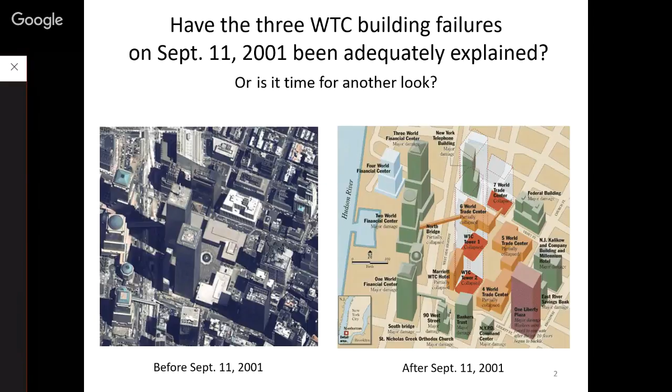As I've just mentioned, there were 3 official reports on the building failures: the FEMA report in 2002 and the 2 reports by NIST in 2005 and 2008.

In addition, there were 3 privately funded reports on the Building 7 failure alone. 2 of those were done as a result of a lawsuit brought by Con Edison and their insurance company against World Trade Center properties. One was done by the Arup Group, for the plaintiffs in that lawsuit. Weidlinger Associates performed a report for the defendants in that study.

In addition, we, AE 911 Truth, funded a study of the Building 7 collapse, performed by the University of Alaska Fairbanks Department of Civil and Environmental Engineering under Professor Leroy Hulsey. He's issued a preliminary progress report in September of last year, and the final report is due out later this year.

Starting with Building 7, it was the 3rd high-rise to collapse that day, about 350 feet north of the North Tower.

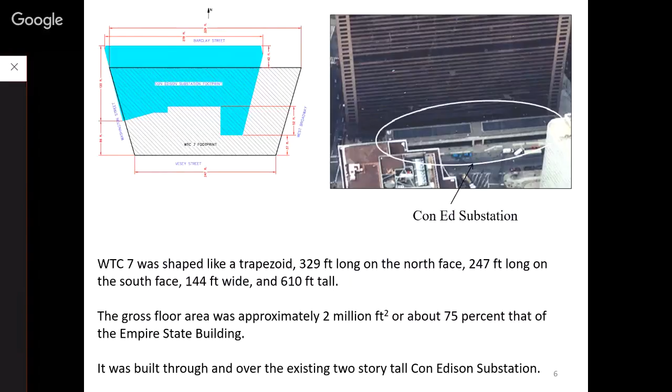It was a 47-story building. Each floor had about an acre of area. It was shaped like a trapezoid. Gross floor area about 2 million square feet, and it was built through and over the existing 2-story tall Con Edison substation, a very unusual arrangement.

We're going to be focusing on the northeast corner of that building because that is where NIST says the collapse was initiated, due to the failure of a girder that ran between column 44 and column 79. In our next photo, we're standing at the northeast corner of the building, looking west down the length of it. What we see overhead running from right to left is the girder itself that supposedly failed, and the beams that framed into it from the east were the cause of that failure by heating and expanding due to the office fires.

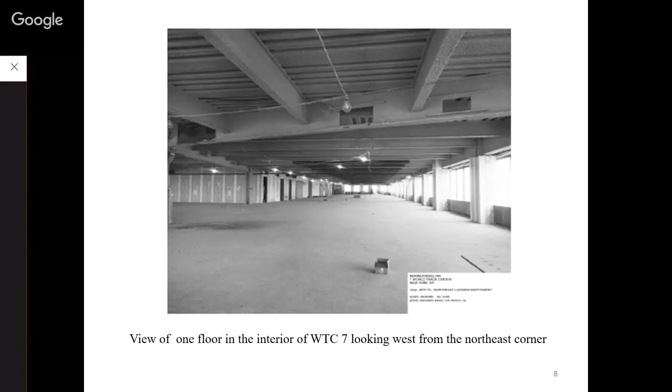The foundation caissons went right through the Con Edison substation, and this is an example of what the construction looked like during the construction phase.

As to the failure itself, it occurred approximately 7 hours after the fall of the Twin Towers, at 5:20 in the afternoon. It was a 610-foot tall steel frame building. It wasn't hit by a plane, but it collapsed and turned into a 5-story rubble pile in about 7 seconds.

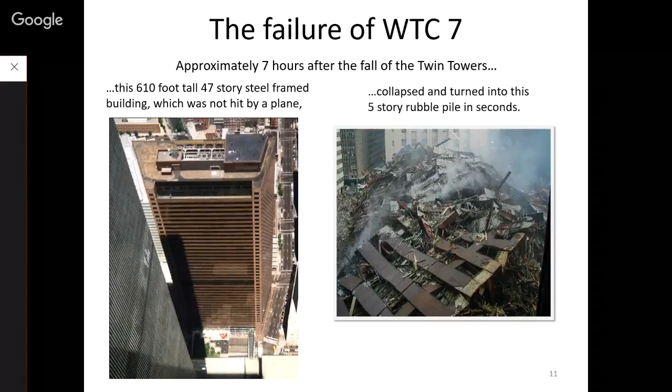We're going to watch that collapse here on video.

For the 3rd time today, it's reminiscent of those pictures we've all seen too much on television before, when a building was deliberately destroyed by well-placed dynamite to knock it down. Did they actually use the word brought down, and who was it that was telling you this? The fire department, and they did use the word, we're going to have to bring it down. We heard this sound that sounded like a clap of thunder. It looked like there was a shock wave ripping through the building, and the windows all busted out. About a second later, the bottom floor caves out. The building followed after that, and we saw it crash down all the way to the ground.

I turned in time to see what looked like a skyscraper implosion. Looked like it had been done by a demolition crew. The whole thing just collapsing down on itself. It was almost as if it were a planned implosion. It just pancaked.

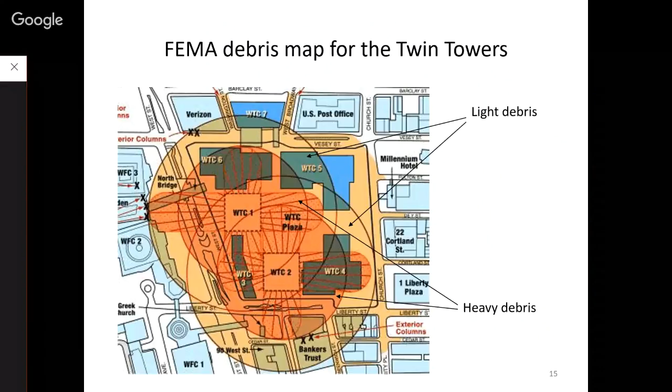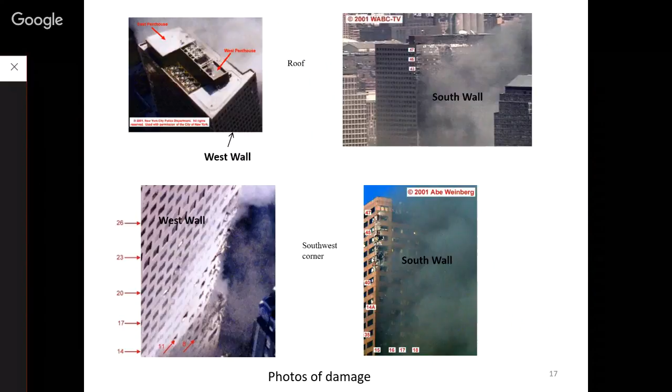There was a series of fires in the building after the World Trade Center towers collapsed, and we can see the smoke from those fires and some of the damage to the west wall here. NIST mapped the damage to the building and indicated there were 2 primary zones of damage: in the lower left-hand corner on the lower floors, and near the top, more toward the center of the building. But they concluded that the debris damage did not affect the collapse of the building.

There was diesel fuel in several small tanks in the building. FEMA thought there might be a low probability of them igniting the fires. NIST agreed that was a low probability, and most of the fuel was recovered from the main tanks in a vault below ground afterwards. Firefighters testified they neither saw nor smelled diesel fuel fires. So diesel fuel as a cause of the fires was eliminated.

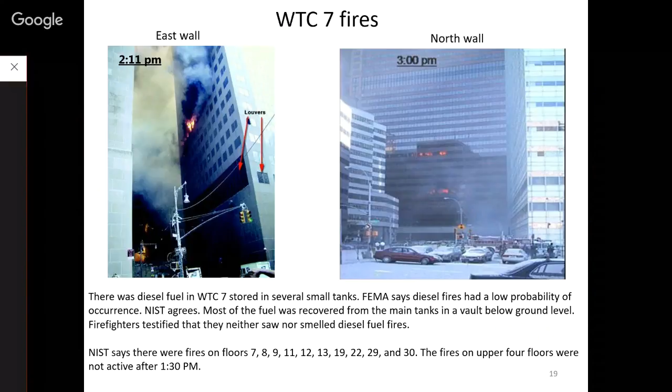NIST noted there were fires on floors 7, 8, 9, 11, 12, 13, 19, 22, 29, and 30 at some point during that day, and that the fires on the upper 4 floors were not active by about 1:30 p.m. Keep in mind the building came down at 5:20.

The NIST collapse theory for the building looks like this. They said that fires on the 12th floor heated the beams in the northeast corner of the building on the 13th floor, and those beams expanded.

Or sagged and pushed that girder off of its seat at column 79 on the 13th floor. That caused the girder to fall off its seat and impact the next floor down on the 12th floor, and that caused a cascade 8 floors down to the 5th floor.

As a result, leaving column 79 unsupported laterally so that it buckled, which then spread north to south and east to west, causing the entire central core columns of the building to progressively collapse and ultimately cause the entire exterior to buckle due to the lack of lateral support for those columns. So that is the NIST collapse theory, how it was initiated, how it progressed, and how it ended.

They said that the reason for the collapse was entirely due to office fires.

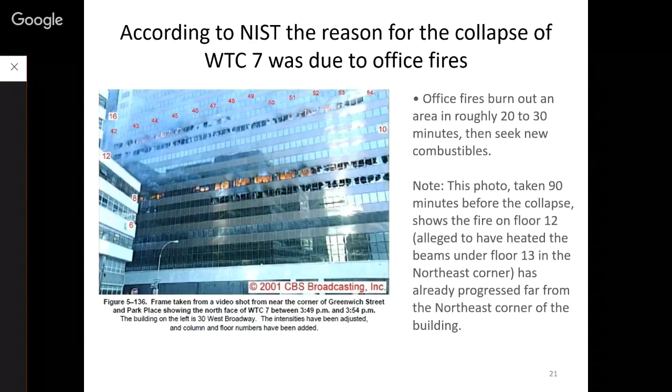Here's the erroneous assumptions, the errors, the omissions, and the other issues with the Building 7 report that we're going to discuss.

The girder bearing seat at column 79 for that girder, according to NIST, was only 11 inches wide. They also said there were no stiffeners on that girder at the column, and that the thermally expanded girder could move past the column 79 side plates, that there were no shear studs on the girder, that the west and south girder connections to column 79 were broken all the way down to the 6th floor.

That the northeast corner floor failure cascaded down 8 floors, that there was no lateral support beams framing into beam G3005, that they notched their beams and girders to simulate their buckling due to fire in their model.

There is evidence of high temperature enough to melt steel documented by FEMA that was ignored by NIST. And the NIST model shows radical deformation of the upper exterior as the east side interior collapses, but that is not observed in the actual video footage of the collapse.

There was a simultaneous free fall of all 4 corners of the roof line, and NIST did not investigate the implications of that. And they refused to respond to legitimate inquiries. So then we'll summarize that before we go on to the Twin Towers.

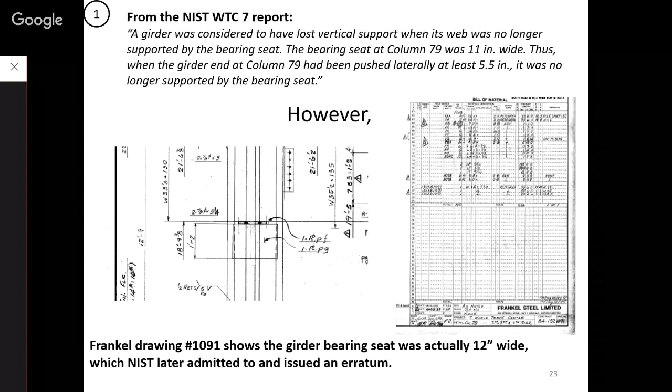We'll stop and take a look at what happens when the beams are heated and the girder's heated and the column is heated and what they were heated to. The NIST report claimed that the beams were heated to 600 degrees centigrade, the girders were heated to 500 degrees centigrade, and the column was heated to 300 degrees centigrade in the area around column 79.

Looking at their stiffness, we see that the beams at 600 degrees have lost 70% of their stiffness. The girders at 500 degrees have lost 40% of their stiffness, and the columns at 300 degrees have lost 20% of their stiffness. So we take those temperatures as gospel, and we use those same temperatures in our analyses that we ran in the Building 7 report at the University of Alaska.

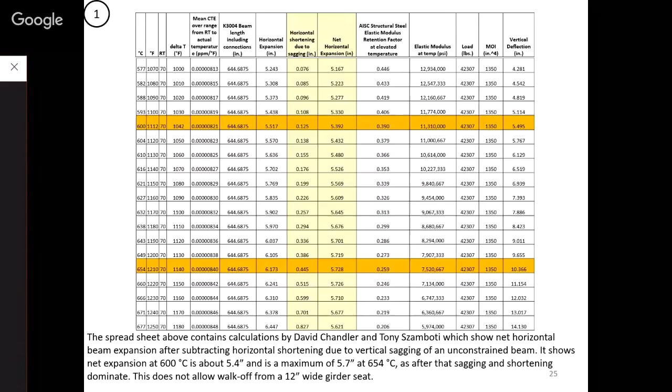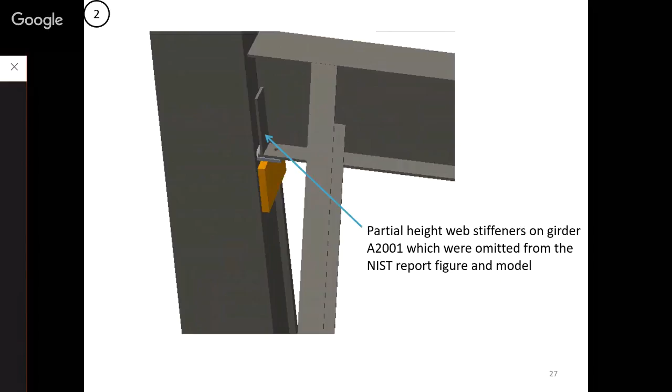This is a pictorial view showing the stiffeners. The NIST representation shows no stiffeners. They simply left the stiffeners off. Photograph shows that, in fact, the stiffeners were installed at the end of the girder.

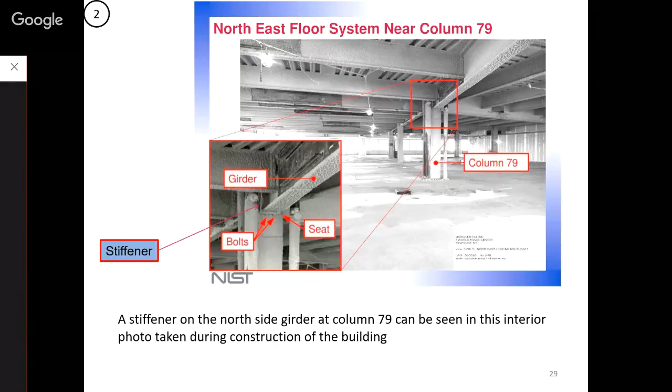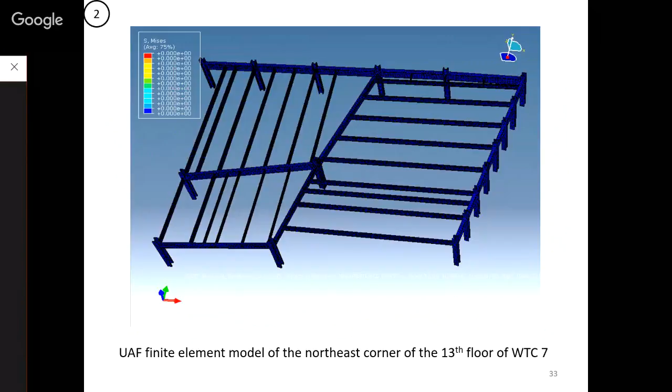So we go to Professor Hulsey's finite element modeling of the building. This is the 12th and 13th floor of his Abaqus model, heated to the temperatures used in the NIST report. A view of his northeast corner of that floor. And his finite element analysis showed that with the girder web stiffeners included, the web could be beyond the bearing seat with no flange failure occurring due to the partial height stiffener, which made the flange much more robust in bending. So the omission of those stiffener plates introduced a critical error in the NIST model.

NIST eventually admitted leaving the stiffeners out in a letter to one of our researchers, David Cole, and they said that the web stiffeners shown at the end of the girder prevent web crippling, and the structural analysis did not show any web crippling failures. Therefore, the web crippling plates did not need to be included in the models or the analysis. That was a letter signed by a person in their public relations department, and no engineer signed off on that allegation, which is a patently absurd conclusion.

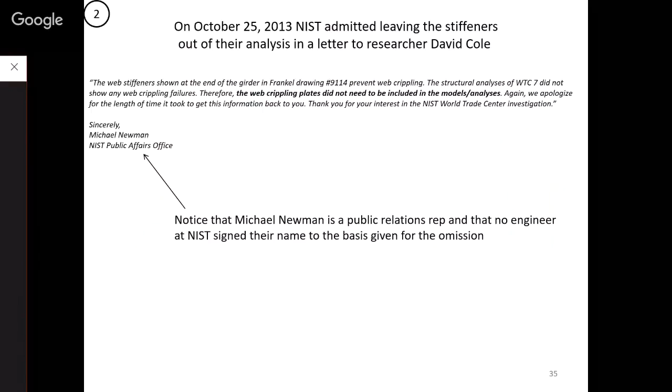Then there's the question of side plates. Side plates were welded to column 79 at the floors, and they extended 1.8 inches past the column flange. Now that's important because when you heat the beams and the girder and the column, the girder expands, and as it's pushed by the beam, it's trapped behind the side plates. It can't get past the side plates because it's jammed right up against the column.

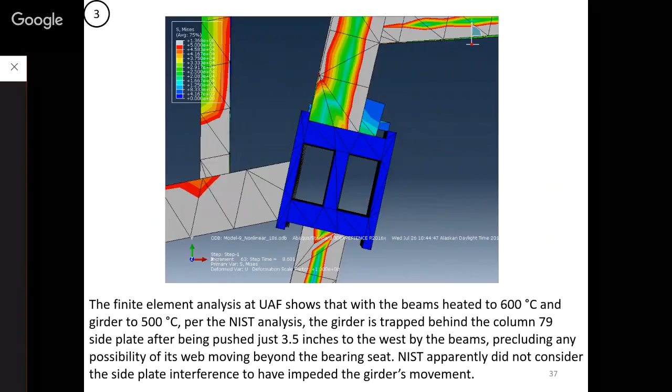NIST apparently didn't consider the side plate interference at all. Never mentions it, never discusses it. So that's an omission that, again, has critical implications, because if the girder can't move past the side plates, it can't get off the seat, and it can't fall, and it can't fail. And their collapse initiation theory is worthless.

They also claim that there were no shear studs on the girders. The final version of the revised drawing shows that there were 30 shear studs on that girder. So here we have another omission. Why is that important? Well, NIST calculated the force required to shear one of those studs, and it turns out to be about, they show it here on the left, and you look down, you see it's about 19.5 kips.

Using that shear force required to breach each of those shear studs on the girder would require a total of 585 kips to be applied by the 5 beams pushing from the east, pushing on the girder. That's about 117 kips for each beam. The problem with that is that the beam itself can only withstand an axial force of about 21 kips before it begins to buckle. And if you heat the beam to 600 degrees centigrade, like they said it was heated, the modulus of elasticity is reduced, and then you can only get a total force of about 7 kips per beam. So there's nowhere near the lateral force on that girder as required by NIST due to the fact that those shear studs on the girder could not be broken.

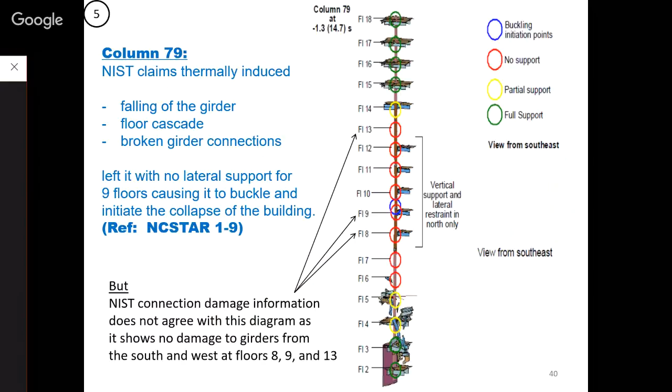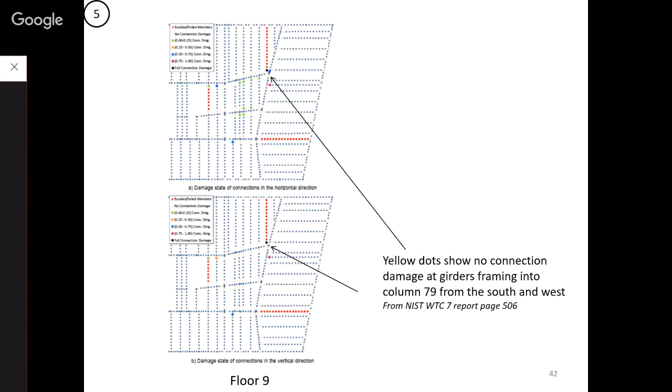The same thing on floor 9. No connection damage, framing into that column from the south and the west. Same on the 13th floor. This is the NIST report.

So what that means, we know that a column requires lateral support from 2 orthogonal directions to resist buckling. And due to its moment of inertia, column 79 could span at least 5 stories with no lateral support without buckling. But the NIST floor connection damage shows that column 79 never had less than 2 orthogonal girders laterally supporting it for more than 3 stories. So their buckling theory for column 79 is not possible.

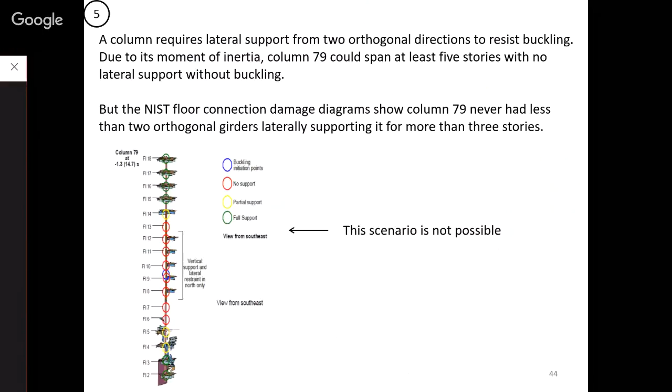But furthermore, even if we allow the girder to fall, the floor will hinge down from the north and the east and impact the girder below near column 79 on the 12th floor. Now, we can calculate the force required to shear the welds to the column of the 14-inch support plate underneath the girder bearing seat, and that turns out to be 632,000 pounds. That's a very straightforward calculation. You're going to have to hit that connection with 632,000 pounds to break it loose and initiate the cascade on down below.

So we did a modal analysis of that section of the corner of the building, and the natural frequency of that section of the floor turns out to be about 0.52 hertz. We know that the concrete wouldn't fall with the beams and the girders because of the shear studs being broken and the welded wire fabric installed in the concrete and the shear studs in the exterior girders being intact. So that's the way that thing is going to fall down. Knowing the natural frequency, we can figure the stiffness of the system, and it turns out to be about 6,600 pounds per inch.

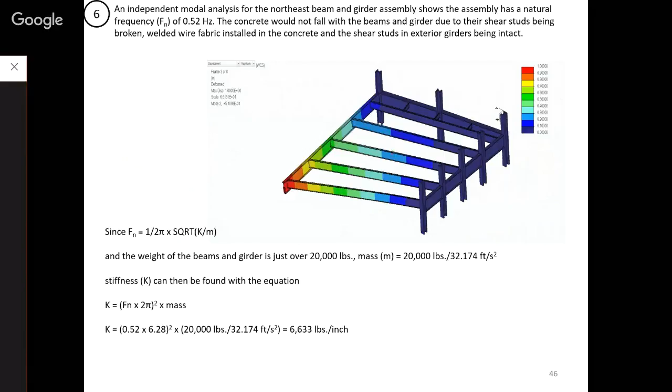Once we have the stiffness, we can use it in the impact calculation and find the combined stiffness of the system, the 12th floor and the 13th floor together. Now, the lower floor is very stiff because, of course, it's still attached to the floor and the columns. That turns out to have a stiffness of over 7.5 million pounds per inch. That was what Arup calculated, and we agree with that. So you get the combined stiffness using the reciprocal rule, and it hasn't changed much. It's still something over 6,600 pounds per inch.

So Arup's analysis used a potential energy at impact of 3,473,000 inch-pounds, and we verified that. It's good. And you can use the standard equation to find the deflection of the girder and beam assembly, and that turns out to be a little over 32 inches. Using a standard equation to find the force from that, the force turns out to be 215,144 pounds, but we've already noted that you need 632,000 pounds to break that shear and cause that 12th floor to break loose.

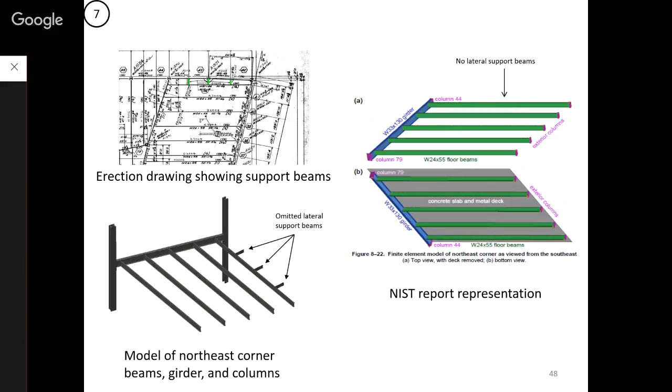NIST left those off. Another omission. Without those support beams, that beam will buckle when it's heated. The UAF analysis confirmed that. NIST said that. We agree. Problem is that the lateral support beams really are there, and when you put them in, that beam doesn't buckle. So that, again, is going to change the behavior of the system and the conclusions that you can come to from it.

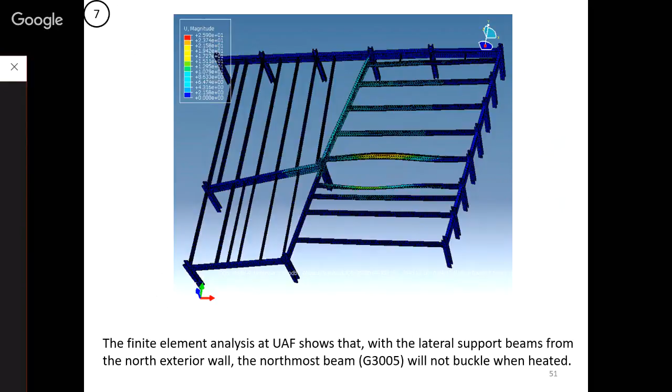NIST went on and showed that they were going to notch the beams and girders throughout the floor system in a manner that would cause the beams and girders to act as tension members, so that when the interior columns collapsed, they would pull the exterior columns in and spread the collapse mechanism.

But you can't just come along and arbitrarily notch those beams and girders like that. That would indicate that this mechanism would occur simultaneously in all these beams and girders, and that's not going to happen in reality, because any weakness in those beams and girders would have been caused by the fires, and the fires acted in different areas at different times, and they would not act in the uniform manner that NIST indicated they would. That is a device that NIST used to make their collapse initiation and progression model work. It's not allowed.

Then there's the question of excessive temperatures. There was only one piece of metal that was saved from World Trade Center 7 for analysis. That one piece, however, showed high temperatures and unusual erosion patterns. That was examined. FEMA examined it, said there were microstructural changes and severe erosion and evidence of high temperature attack on the steel, including oxidation and sulfidation with subsequent intergranular melting. And that was readily visible in the near surface microstructure.

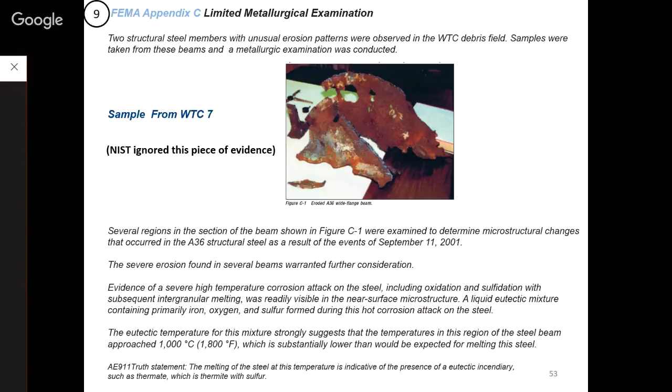Videos of the actual collapse of the building show that the NIST model doesn't replicate the observed behavior of the building. Real collapse doesn't have the exterior deformation at the top of the building seen in the NIST model, and the NIST model stops early, which fails to show how the entire collapse would actually have occurred. So, we'll look at that collapse now. Compare the actual with the model.

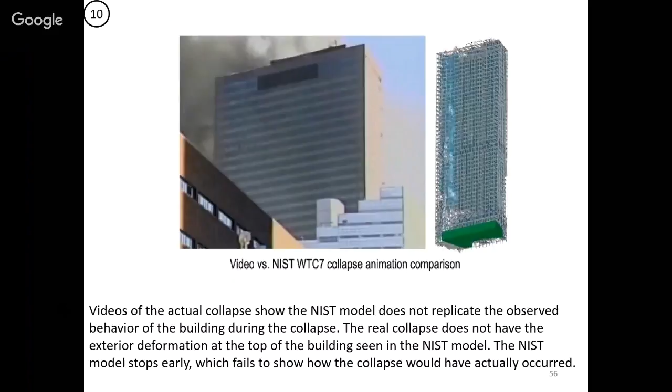You see in the NIST model, their collapse starts on the 13th floor. There's a collapse down to the 5th floor. The column becomes unsupported, and the instability then spreads throughout the building from north to south and east to west. However, that causes a deformation of the building because the collapse mechanism can't work quickly enough to make it happen all at once. Doesn't look anything like the way the building itself looks coming down right into its own footprint without significant deformation.

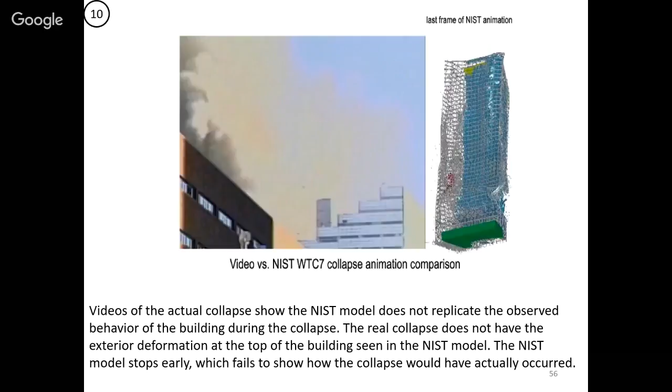NIST stopped its simulation several seconds into its process, and that raises a question of why that happened. Here's a graphic from their report that shows what the building looked like further into its collapse mechanism, and we can see why they stopped the graphic animation, because the top of the building has twisted around more than 90 degrees normal to the face of the building, and it is rapidly assuming a very distorted appearance.

This is the model without debris damage, and they didn't show what it would look like with the debris damage from the North Tower.

Then there's the question of free fall acceleration. Physics teacher David Chandler proved the entire roof line of the building was in full free fall acceleration for about 2.5 seconds, which would be about an 8-story fall. That occurred near the beginning of the collapse. NIST was confronted with this fact in their preliminary draft report on the building, and they admitted it in their final report, but they didn't address the implications of free fall, and they didn't change their model or their conclusion.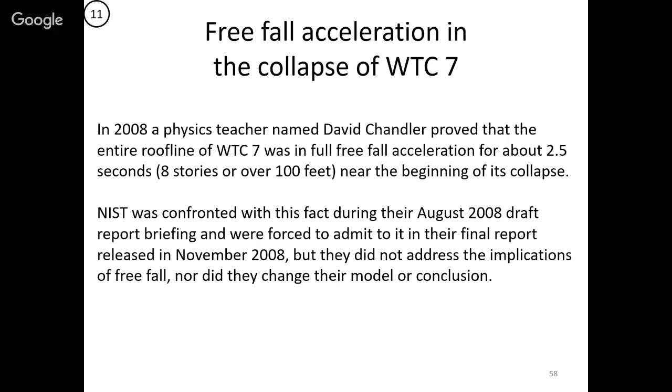The columns were supposed to be buckling in the building, and a column buckling always has some residual resistance even after it's fully buckled. We see the graph showing the deflection of the building, of the column, compared to its full height. And we see that there's minimum resistance and it decays until the ratio reaches about 0.5, and then it levels out, never gets to be any less than that.

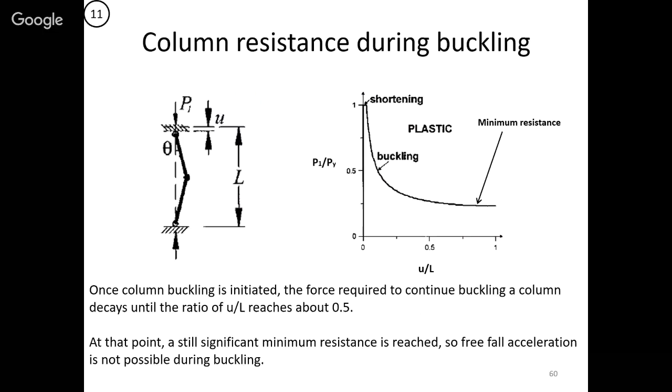That means that because of that resistance, free fall acceleration isn't possible when columns are buckling. In free fall, an object's potential energy is converted to kinetic energy, and it can't be doing any other work.

So all the assumptions listed below, which were used in their report, have been shown to be erroneous, and the correction of these assumptions invalidates the report's conclusion.

The girder bearing seat was 12 inches, not 11 inches. Stiffeners would have prevented the flange from folding, eliminated the chance of a girder walk-off. The thermally expanded girder couldn't move past the column side plates. There were shear studs on the girder that would cause the beams to buckle before pushing the girder off its seat.

All the west and south girder connections to column 79 were not broken down to the 6th floor. The northeast corner floor failure could not cascade down 8 floors because there's not enough energy to break through the girder connection on the next floor down.

There were lateral support beams on beam G3005. They would have prevented it from buckling. The beam and girder notching that NIST used to simulate their buckling due to fire in the model is not consistent with the time-phased weakening that fire would produce.

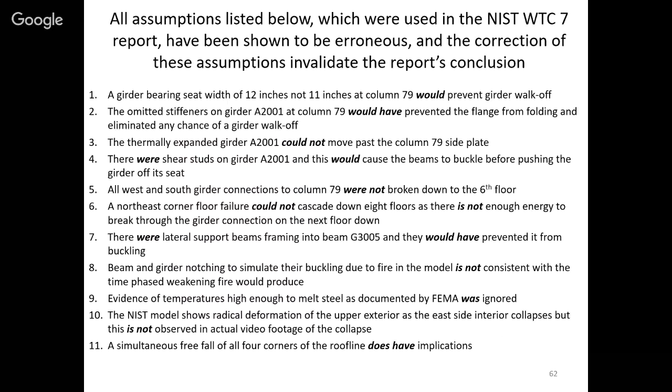We believe this is probably the first time in history that the laws of physics have been claimed to be a threat to public safety.

Summarizing their reports, problems with the Building 7 report: the seat 12 inches wide, not 11 inches wide, prevents the failure of the web of the girder. Stiffener plates prevent the failure of the flange of the girder. Side plates on the column prevent the girder from walking off the girder seat.

The shear studs cause the girder to act as an integral body with a concrete slab and prevent the 13th floor from collapsing. Column 79 wasn't laterally unsupported for 9 floors, according to NIST's own information. They omitted the lateral support beams for beam G3005. They would have prevented it from buckling that NIST claimed occurred.

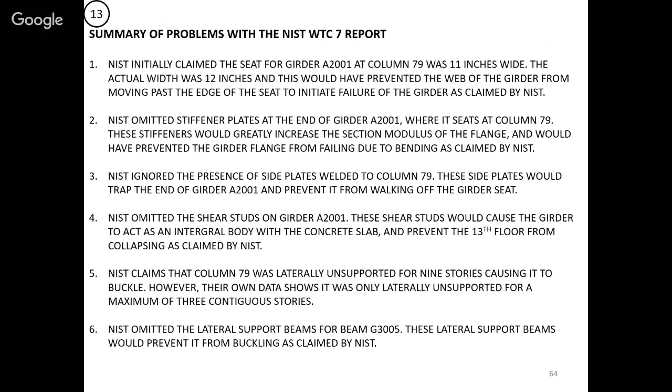They miscalculated the magnitude of the load imposed on the girder on the 12th floor, caused by the collapse of the girder on the 13th floor. Couldn't break the welds. 12th floor wouldn't collapse.

They imposed unrealistic artificial fire damage symmetrically to floor beams and girders in the building in order to get their computer finite element model collapse sequence to work. They omitted the information contained in the FEMA report, Appendix C, of the salvaged beam in World Trade Center structural steel that exhibited evidence of intergranular melting, and they give no explanation for this omission.

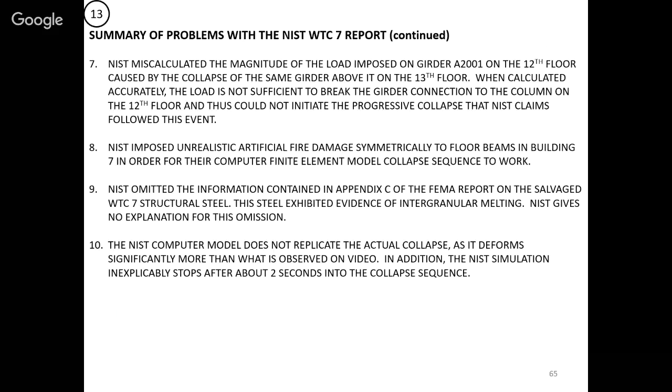Their computer model doesn't replicate the actual collapse. It deforms significantly more than what is observed, and in addition, it stops shortly into the collapse sequence. They acknowledged free fall for 2 and a quarter seconds, and that violates their fire-induced theory of collapse initiation. Asymmetric fire damage couldn't result in symmetric simultaneous loss of support in 82 columns.

And they refused to release relevant input data for critical calculations of their collapse models, stating that the release of the information could jeopardize public safety.

Now we're going to move on to the Twin Towers. The items we're going to discuss are these: the background of the buildings, the aircraft impacts and damage, the NIST

column failure theory and the collapse hypothesis, the evidence that the core columns failed first, the ASCE published progressive collapse theory and an analysis of that theory, the South Tower collapse symmetry anomaly, other high-rise fires, destruction of the evidence, a summary of their problems with the tower reports, and then the deficiency categories in their reports and the ASCE published theory.

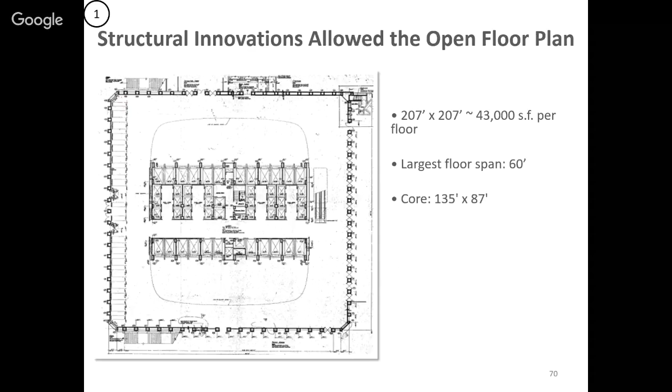They were solidly constructed: 47 massive steel core columns, 240 steel perimeter columns, amounting to a 100,000 ton heat sink.

Central core columns were tapered in height. They were virtually structural pyramids. They got thinner as they rose up in height, and they transitioned to rolled wide flange columns at the upper floors of the towers.

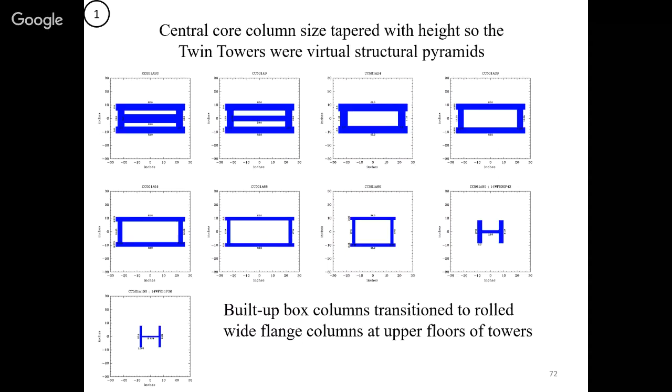There were 12 different strength steels used at different heights on the perimeter columns of the towers, to accommodate the wind load and seismic stresses while keeping the gravity-induced unit stress on both the perimeter and the core columns at each floor the same, to eliminate floor warpage.

Looking at the plane impacts, the North Tower was hit at 8:46 a.m. that day. It collapsed 102 minutes later. That was American Airlines Flight 11, a Boeing 767-200 extended range aircraft, hitting the building with an estimated impact velocity of 473 miles per hour at the center of the north face between the 93rd and the 99th floors.

The South Tower was hit at 9:03, 17 minutes later. It collapsed in 56 minutes. That was United Airlines Flight 175, the same type of aircraft, with an estimated impact velocity of 566 miles per hour. It hit off-center toward the east wall, angled in, between the 77th and the 85th floor of that building.

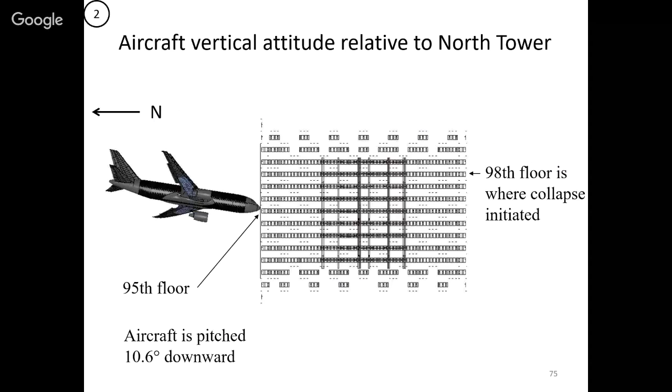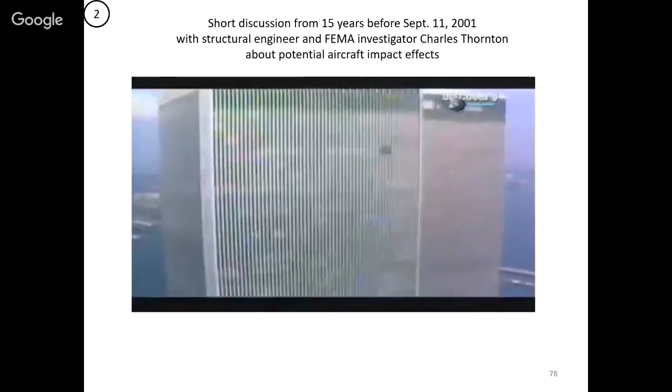This is a discussion about the potential for the collapse due to aircraft impact, with structural engineer Charles Thornton, who later turned out to be one of the FEMA investigators. The fact that they were designed to resist over 13,000 tons of wind pressure meant that they could not be knocked over. In a remarkably prescient interview given over 15 years ago, Charlie Thornton, now one of the investigators, considered the scenario: 13,000 tons is a lot of force.

People always talk about an airplane crashing into a building. And in 1944 or '45, a plane did crash into the Empire State Building.

The largest aircraft flying today commercially, the 747 fully loaded, is on the order of 300 tons. So if you think about a 300-ton element crashing into a building designed to carry 13,000 tons, you can see that an aircraft crashing into the World Trade Center would probably not do anything to the major building. It could affect localized structural elements, could knock out a column, and there could be some damage.

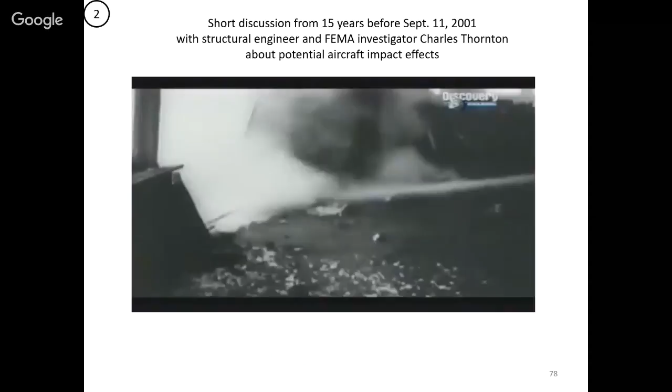But as far as a plane knocking a building over of that type, that would not happen. Since the Empire State accident had shown that a plane could crash into a New York skyscraper, the designers were forced to consider that. In fact, the designers did consider that.

John Skilling, who designed the towers, said that he designed the World Trade Center tower to take a hit from a Boeing 707, which was the largest commercial aircraft flying at that time, and is very close in size to the 767s that did hit the building. He said his analysis indicated the biggest problem would be the fact that the fuel would dump into the building, but the building structure would still be there.

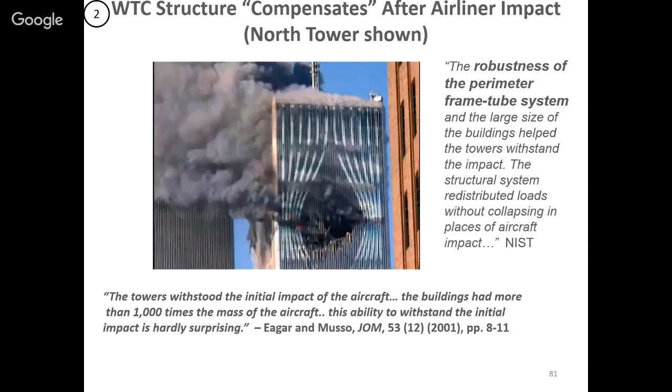We're going to see how the buildings compensate for that impact in this video segment here. The robustness of the perimeter frame tube system and the large size of the buildings helped the towers withstand the impact. The structural system redistributed the loads without collapsing in places of the aircraft impact. That's NIST's observation.

An impact analysis shows that the wings were shredded before they hit the central core. And the diameter of the fuselage is only 16.5 feet compared to the central core at 135 feet wide.

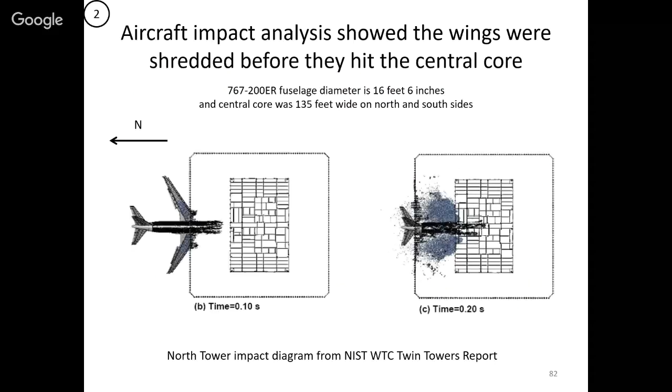A pictorial view of the calculated damage to the central core shows that there's little to no damage on the 98th floor.

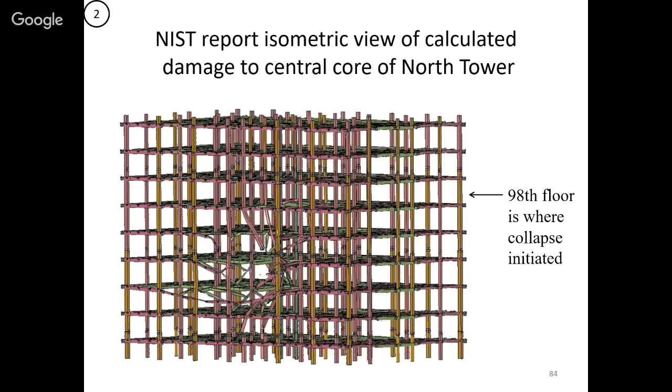These are the reasons why the aircraft impact and the jet fuel couldn't have caused collapse. The wings wouldn't have made it to the central core. Most of the jet fuel was aerosolized on impact. Most of it remained outside of the building. Fuel which did enter the building burned up within a few minutes. The redundant steel frame redistributed the loads. And the factor of safety against vertical collapse for the perimeter columns was 5-to-1, and the central core was 3-to-1. So this is far too high for the impact damage to approximately 20% of the columns to have caused collapse.

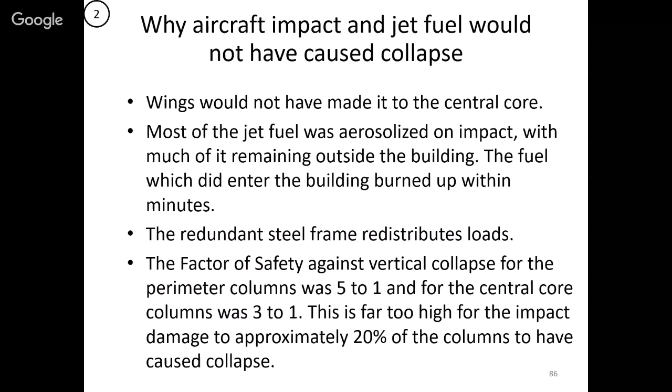Now, NIST theorized that the exterior columns failed because fires heated the floor trusses, which in turn sagged, causing them to buckle and pull the exterior columns in, and that's what started the whole global collapse. They said that this happened on the south face of the North Tower and the east face of the South Tower.

Now, there's no video evidence or pictorial evidence at all that indicates that the perimeter columns were bulging outward, which they would have had to have been if they were being subjected to forces of 80 kips pushing outward.

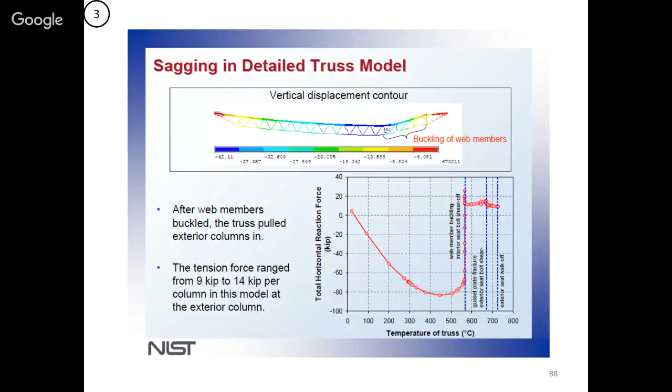Instead, when it gets to about 560 degrees, the web members collapse and the floor truss begins to sag, and then they say it pulls inward on the columns with a force of 9 to 14 kips. However, their global model couldn't produce an inward force from the sagging floor trusses which was strong enough to pull the columns inward. 9 to 14 kips didn't cut it.

So they applied an artificial 5,000-pound lateral load to all of those connections in the impact zone in order to make the columns buckle. Well, there's no basis for that assumption. You can't just assume loads of that magnitude and put them into your calculations to make your model work.

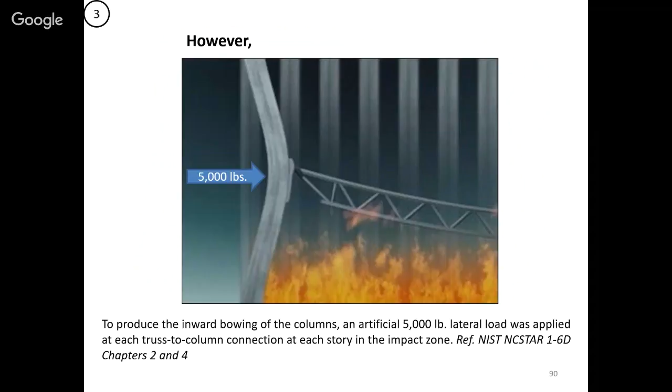They did that on every single connection in the impact zone. That amounts to a total load of about 750,000 pounds that they applied to that face of the building, which wasn't really there. They did it because they needed to produce the bowing of the columns inward, which they say occurred in this manner.

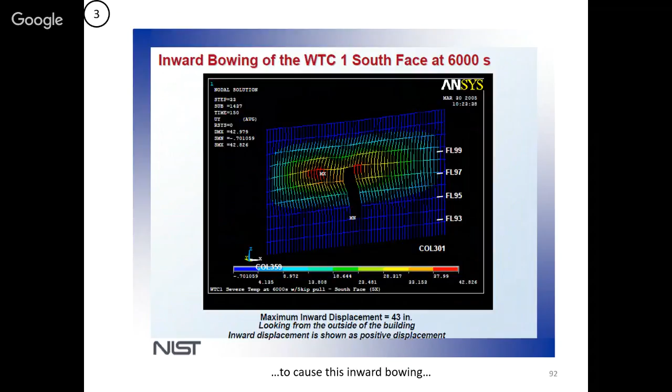And they said that they measured this from photographic evidence, and the maximum bowing would occur at about 43 inches inward. This was supposedly at 10:22 a.m., which is 7 minutes before that building collapsed.

So let's look at their explanation for the collapse initiation.

With the continually increased bowing, more columns buckled, and the entire width of the south wall buckled, starting at the center and rapidly progressing toward the sides. As a result of the buckling of the south wall, it significantly unloaded and redistributed its load to the softened core through the hat truss and to the east and west walls through the spandrels. Two minutes before the collapse, the north, east, and west walls at floor 98 carried about 7%, 35%, and 30% more gravity loads than they did right after impact. The south wall carried about 7%, and the core 20%, less load.

The section above the impact zone tilted to the south as column instability progressed rapidly from the south wall to the east and west walls. That resulted in increased gravity load on the core columns, and the release of potential energy due to the downward movement of the building mass above the buckled columns exceeded the strain energy that could be absorbed by the structure. Global collapse ensued. That's their explanation of how the entire collapse initiation began.

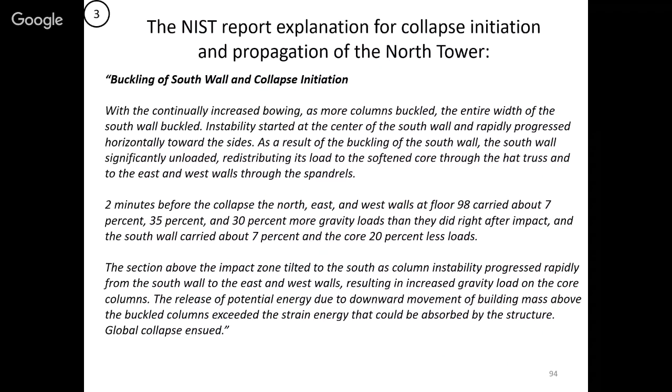Notice that they only say global collapse ensued. They don't investigate at any point in their report how that global collapse progressed from that point forward.

The problems with their explanation are these. There's no evidence or basis for the claim that the sagging trusses could pull in the south wall of the north tower. That's why they didn't generate that load, so they applied artificial loads. They said they had to apply the artificial loads to match the photographic evidence.

But with a factor of safety of 5, the load increase to the east and west walls of 35% and 30% would only increase the demand on those columns to about 27% of their capacity. So there's no reason to expect them to fail. This simply assumes a horizontal propagation across the building, with no evidence that it could occur.

They assume global vertical collapse, and then they relied on a paper by Northwestern University professor Zdeněk Bažant as an explanation for the vertical collapse propagation.

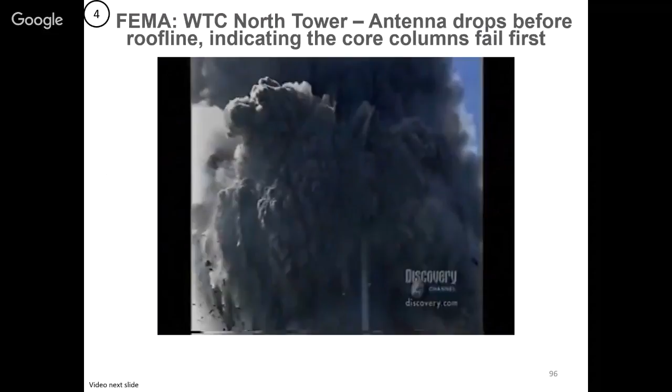The video evidence shows that the core columns are what actually collapse first, not the perimeter columns. We'll see evidence of that here. This is the north tower, which had an antenna on top. When the collapse finally starts, the antenna started just a little bit before the exterior of the building started, and that tells us that the core columns let go first.

If the core columns gave way first, then this collapse initiation theory is wrong.

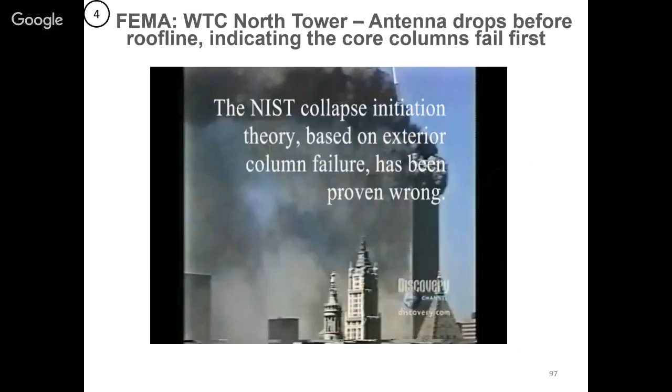Here we can look at the still photographs, taken a 30th of a second apart, of the antenna, and we can see that it drops down, up, down, up, down. So the antenna is moving first. That means the core columns had to fail first.

FEMA said that the transmission tower on top of the structure began to move downward and laterally slightly before movement was evidenced at the exterior wall. This suggests that the collapse began with one or more failures in the central core area of the building. That's FEMA.

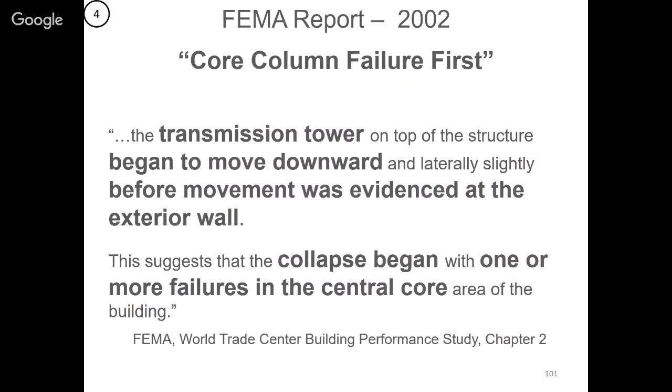The antenna was supported by a hat truss, and the hat truss connected the exterior columns to the core columns. So if the core columns supported the hat truss, what both the video evidence and the FEMA analysis indicate is that the core columns failed first. Then the hat truss and the antenna descended before the perimeter columns. Then the core columns pulled on the floor trusses, and the floor trusses pulled in on the perimeter columns, and that's what initiated the complete collapse.

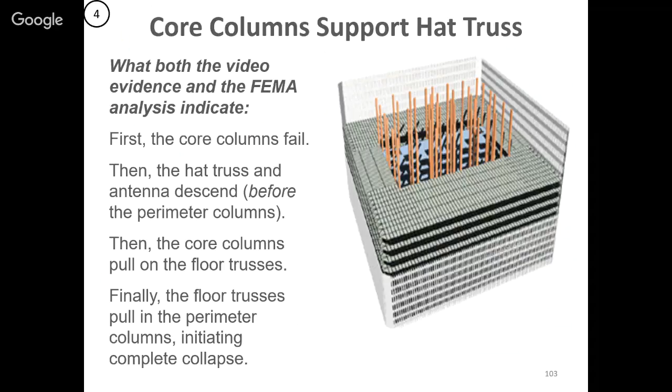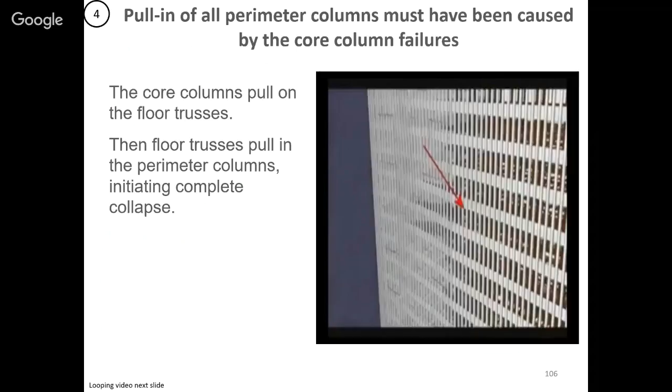But that must have been caused by the core column failures, because when the core columns pulled on the floor trusses, the trusses then had to pull in on the perimeter columns, and that's what initiated the collapse. It would have looked like this.

Now we're going to stop and take a look at the progressive collapse theory that was published by the American Society of Civil Engineers in their Journal of Engineering Mechanics, submitted to their journal by Professor Zdeněk Bazant of Northwestern University 2 days after the attack. It was published in January of the next year in an article titled 'Why Did the World Trade Center Collapse? Simple Analysis.' He claimed that a large dynamic load would have occurred, causing what he termed a powerful jolt, and that would overcome the reserve strength of the columns below.

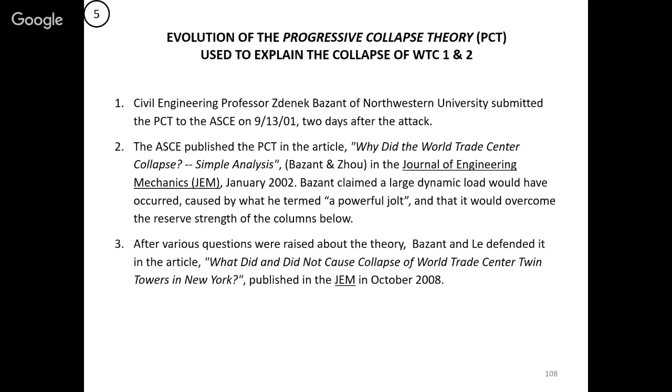But various questions were raised about that theory, and so he came back and defended it in another article, 'What Did and Did Not Cause the Collapse of the World Trade Center Twin Towers in New York,' published by the JEM in October of 2008.

A brief description of his theory is this. He used an energy analysis. He said in a mathematical model that what happened was that the kinetic energy of the upper part of the building, when it fell on the lower part of the building, was greater than the resistance of the buckling columns that failed in the collapse initiation zone, plus the inertial resistance of the structure below the initiation zone, plus the structural resistance of the columns in the building below the initiation zone.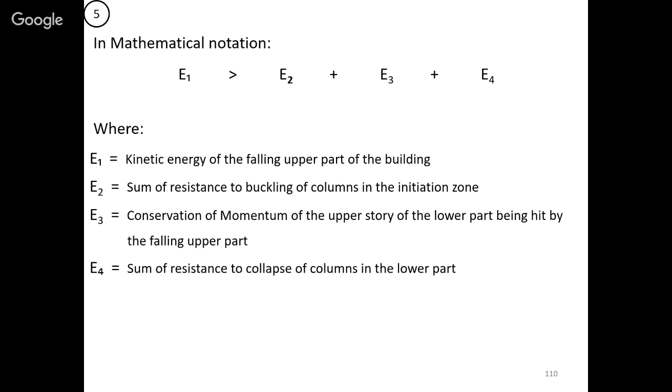In mathematical notation, that would be E1 is greater than E2 plus E3 plus E4, where E1 is the kinetic energy of the upper falling part of the building. E2 is the sum of resistance to buckling of the columns in the initiation zone. E3 is the conservation of momentum of the upper story of the lower part being hit by the falling upper part, and E4 is the sum of resistance to collapse of columns in the lower part.

Newton's third law says that for every action, there's an equal and opposite reaction. That means when the upper part of the building fell on the lower part of the building, it was met by an equal force.

David Chandler measured the collapse of the building, and it showed that there was a continuous acceleration at about 2/3 of gravity with no deceleration at all. You need that deceleration caused by the jolt to amplify the load and overcome the resistance of the building below. However, here we see the velocity plotted against the time, and the slope of that line is the acceleration of the roof line, and it is constant.

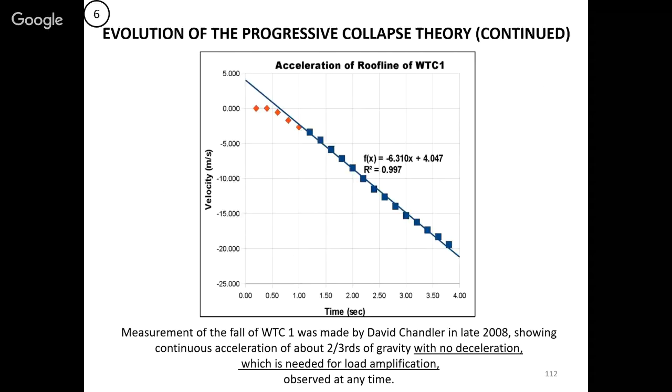So MacQueen and Szamboti published 'The Missing Jolt, a simple refutation of the NIST Bazant collapse hypothesis' on the website Journal of 9/11 Studies in 2009. David Chandler published his 'Destruction of the World Trade Center North Tower and Fundamental Physics' on the website in 2010.

Bazant and Le were forced to come back and defend their theory again in a paper, 'Why the Observed Motion History of the World Trade Center Towers is Smooth.' That was published by the Journal of Engineering Mechanics in January of 2011. Szamboti and Johns submitted a discussion paper to the JEM in 2011, pointing out the errors in Bazant's paper.

It took a year, but they were finally notified by the JEM that their discussion paper was rejected because of one reviewer's comments. So they responded to the rejection with a rebuttal, showing that the rejection was unjustified as the reviewer was wrong on almost all points. The JEM editors responded by agreeing to publish the discussion paper after an editorial review.

However, another year passed, no action on the part of the JEM editors. Szamboti and Johns sent a letter inquiring about the status of their paper. 3 months later, the chief editors of the JEM responded that the discussion paper was out of scope and wouldn't be published. While the above was occurring, Szamboti and Johns joined with Szuladzinski in writing a full technical note addressing all 4 of the Bazant World Trade Center papers that the JEM had published.

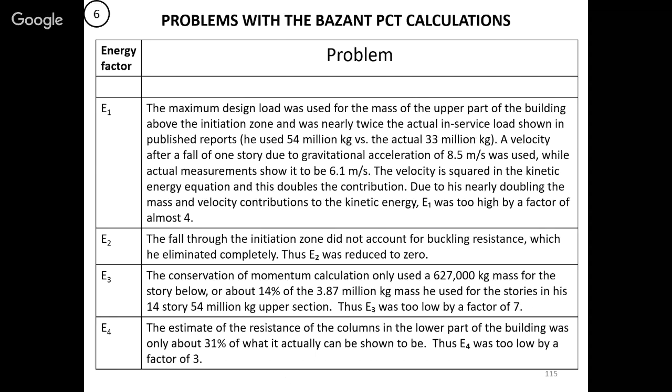And his estimate of the resistance of the columns in the lower part of the building was only about 31% of what can actually be shown to be, and the E4 was too low by a factor of 3. When you correct these miscalculations, the inequality is reversed. E1 is less than E2 plus E3 plus E4, and the progressive collapse will not occur.

When you graph his calculations versus what was actually measured versus what was calculated with a correction of his data, you see his graph is the left. That's Bazant's theory, no jolt. The velocity continues to increase. And the actual measured data by Chandler is shown by the dashed lines with margin of error. But when you correct Bazant's input data, you see that the downward movement is halted altogether in about 2 seconds, indicating that the building doesn't collapse.

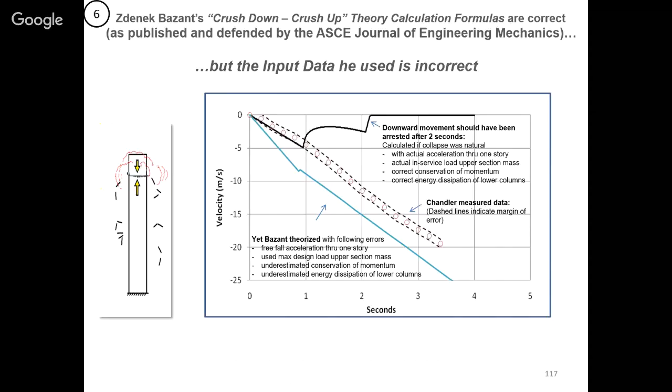If you look at a gravitational collapse theorized by Bazant, you would see the top 12 stories, and this is the North Tower again, driving down the lower part of the building. But the destruction of the upper part of the building is already complete well before the building has entirely collapsed. It's missing. FEMA said that the primary debris field is about 1,200 feet in diameter, and much of the material has landed outside the tower's footprint.

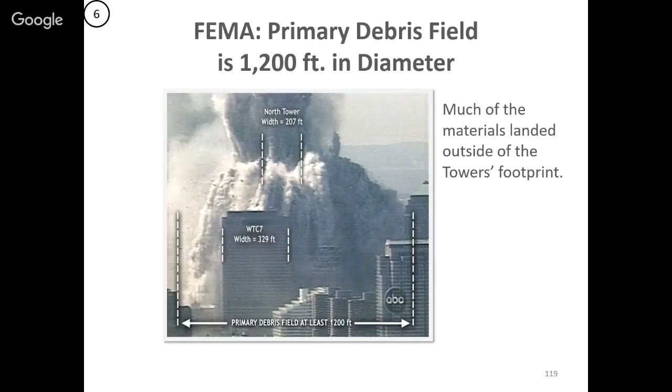Here we'll see video of the top 12 stories disintegrating before any collapse occurs in the lower part of the building. Clearly, the upper portion of the building is not crushing the lower part of the building. The destruction of the North Tower shows that the destruction was symmetric for the first several seconds. Notice that the smoke is coming out evenly on the side and the front of the buildings as it collapses, initiated at the 98th floor.

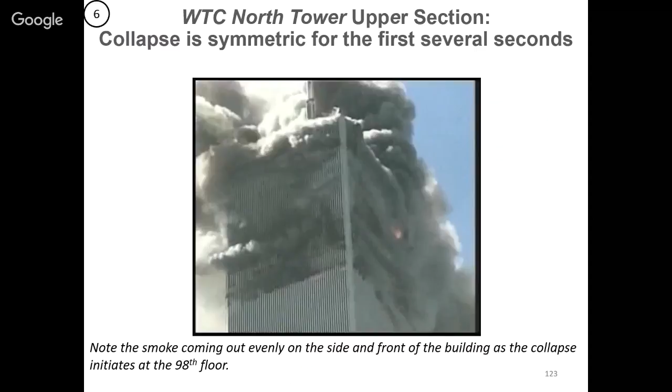In the South Tower, you have a similar thing. Even though the plane hit at an angle, not straight on, even though the top of the building is leaning over, you still have symmetrical destruction of the lower part of the building. You can see it here in this photograph. And you'll see it here as it collapses, coming all the way down symmetrically. How does asymmetric damage cause symmetrical collapse?

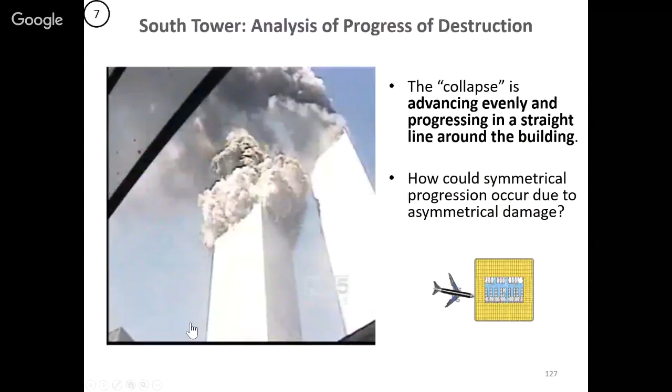Flame-engulfed steel-framed high-rises have never collapsed before. Some examples: 1988 in Los Angeles, 1991 Philadelphia, 2004 Caracas, Venezuela. These buildings were all consumed by widespread fires, much larger and more extensive than what occurred in the Twin Towers. These buildings did not collapse.

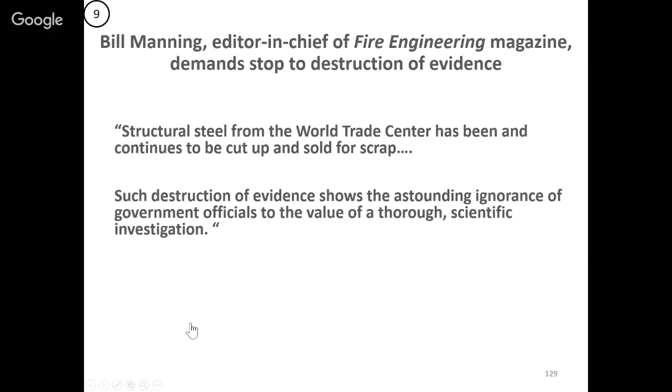Destruction of the evidence caused consternation. Bill Manning, the editor of Fire Engineering magazine, demanded a stop to the destruction of the evidence. He said structural steel was cut up and sold for scrap, and that shows an astounding ignorance of government officials to the value of a thorough scientific investigation. Very little effort made to preserve the evidence. It was destroyed with remarkable speed and efficiency. That is a crime. Destruction of evidence at a crime scene is illegal. We had about 400 trucks a day removing all but a few hundred pieces of steel from the crime scene. That effectively scrubbed it.

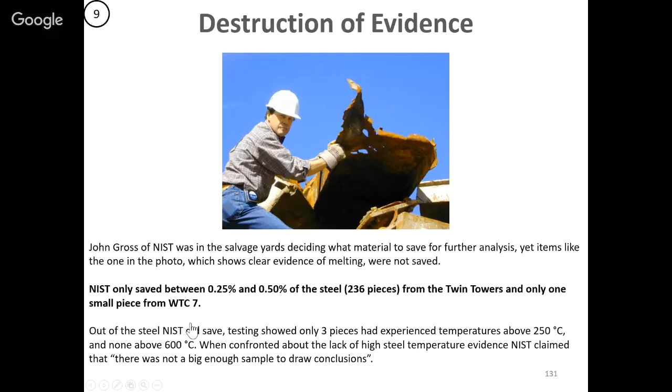Summarizing their problems, their claim that the upper part crushed the lower part violates the law of conservation of momentum and the law that for every action between bodies there's an equal and opposite reaction. There's no jolt. They claim the floor trusses pushed outward on the perimeter columns with a force of about 80 kips. There's no evidence of that.

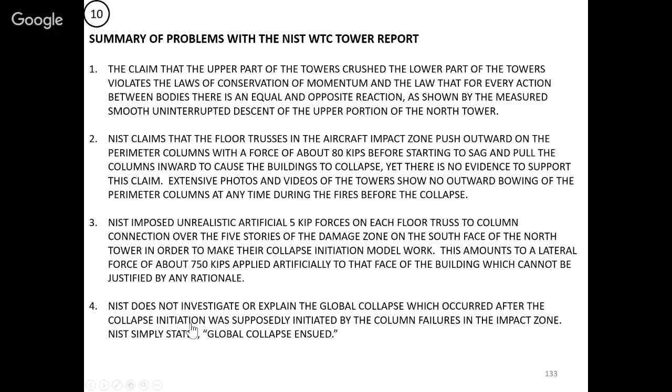They imposed artificial 5-kip forces on each floor-to-column connection over the 5 stories in the damage zone on the south face of the North Tower in order to make their collapse initiation model work. That's not acceptable. Can't do that. They didn't investigate or explain the global collapse which occurred, simply saying global collapse ensued.

The collapse sequence initiated by the failure of the floor trusses and subsequent pulling in of the perimeter columns wasn't strong enough to make that happen. The sequence ignores the fact that the core columns must have failed first. They failed to provide any information suggesting that the load capacity of the core and perimeter columns was exceeded at any time during the collapse sequence.

The factor of safety of 3 in the core and 5 in the perimeter columns would have prevented the failure mechanism that's theorized in their collapse initiation model. They depended upon an ASCE published progressive collapse theory by Professor Bazant. His theory has been shown to have erroneous input data, which renders it non-viable as an explanation for the observed behavior.

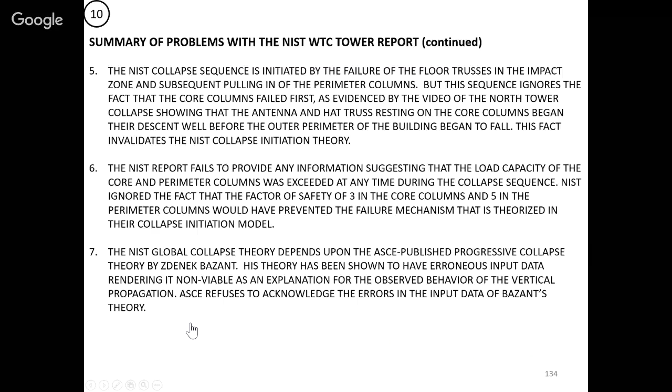This information presents us with the opportunity to join architects and engineers in a call for a new investigation. Here's what you can do. Sign the petition calling for a new investigation. Disseminate this information to engineering colleagues. Donate to AE 911 Truth to help us reach as many engineers as possible. Urge any engineering organization to which you belong to call for a new investigation and become a volunteer presenter for Project Due Diligence to help us deliver this information to local engineering organizations.

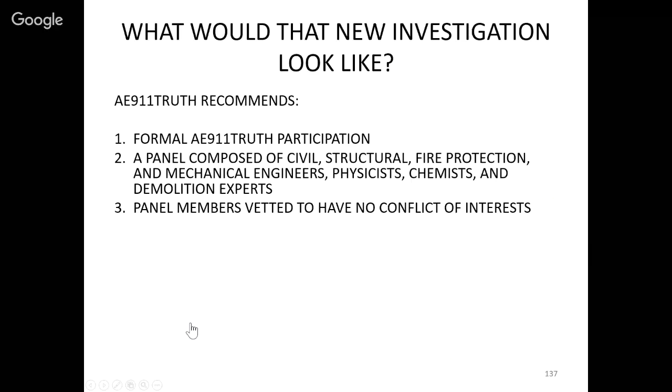What would that investigation look like? This is what we recommend. First of all, our participation, since we've been leading this call for this investigation for the last 12 years. We want a panel composed of civil, structural, fire protection, and mechanical engineers, physicists, chemists, and demolition experts to review the evidence. We want panel members to be vetted to make sure they have no conflict of interest. We want a staff to prepare documents and keep records, subpoena power, adequate funding, a reasonable timeline to investigate and prepare a peer-reviewed report, and a report to be released and broadly disseminated to the public.

Any of the information that we have presented here can be found. All the slides are referenced, and you can go to the original material and verify that the information that we have presented here is accurate and correct. We will open that up to all persons for review.